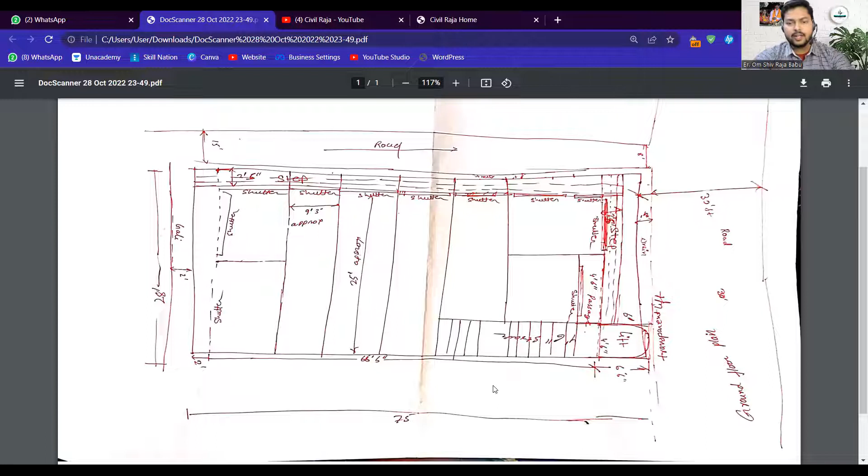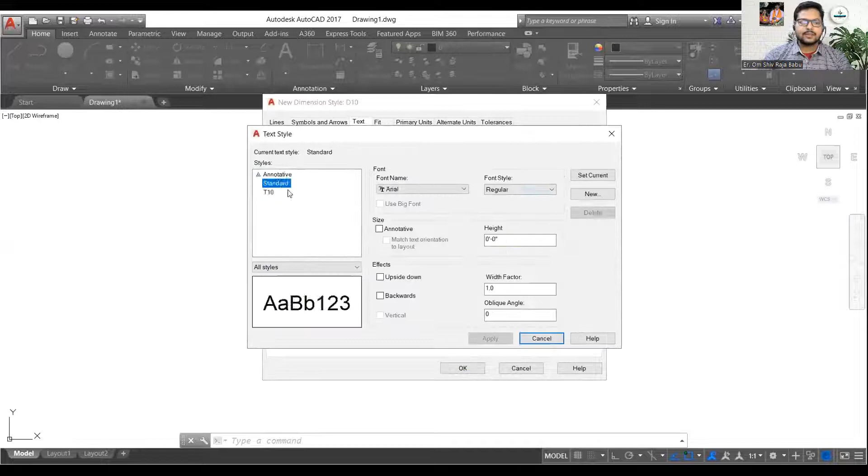I'm going to start with the drafting portion, and for that I have to set the units in AutoCAD. I have already discussed many times how we have to set the units, how we have to decide the precision, how we have to work in layers. All of this is already discussed in detail.

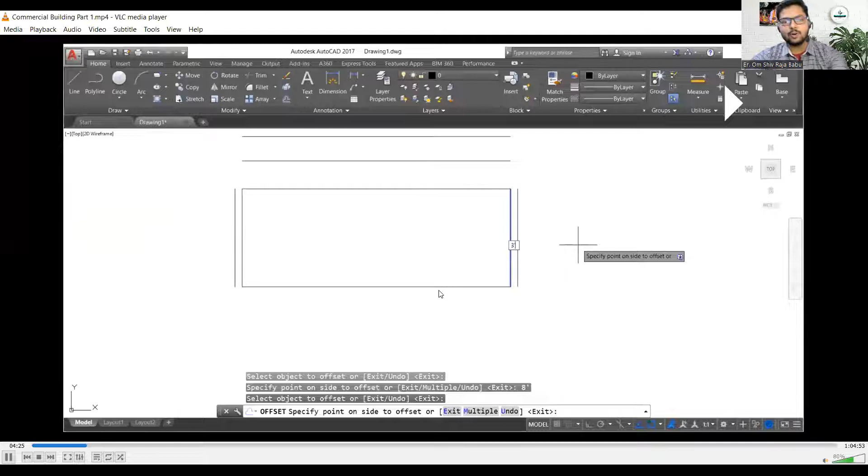Over here you can see I am just drafting everything in the manner that I have discussed. Okay, I think there is some kind of glitch over here. Yeah, now it is working.

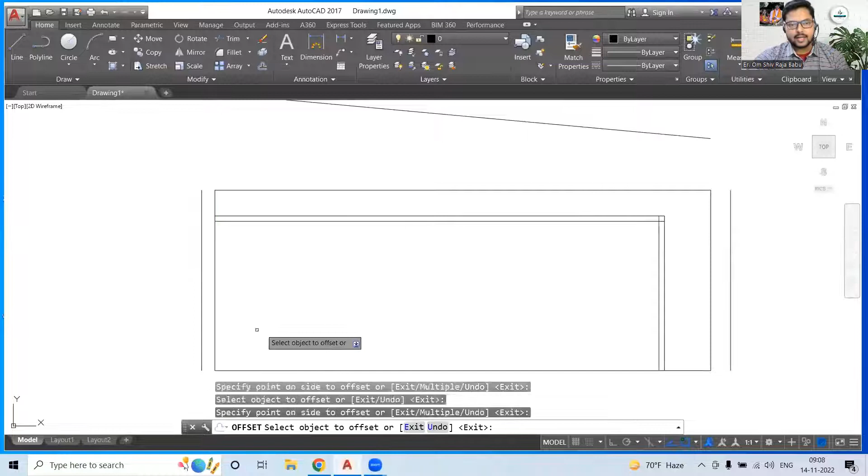So I have to set the units, and after that I will just go with my plot size. On the left I have the gully, so for that I have left a 2 feet wide gully, and on the right another thing that is a 3 feet drain, and the road is also shown over there.

After that, I have to work on the external walls. External walls are taken 10 inches over here, and then I will go for a 9 feet wide shop individually, going for 7 different shops over here. For the internal walls, I am going with a 5 inch wall.

So this is my plan, guys. After that I will just check how much space I'm getting. So in the front, I'm getting a shop of 9 feet 10 inches wide.

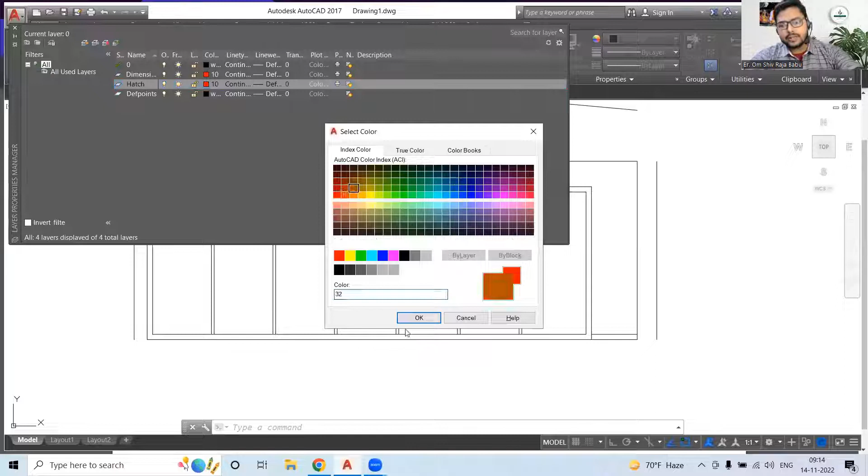After that I have to work on different things over here, so I will just go with different layers. I am creating different layers for the hatches, for the columns, and for anything I am going to need in this particular plan, like even the doors and windows, I will create a different layer.

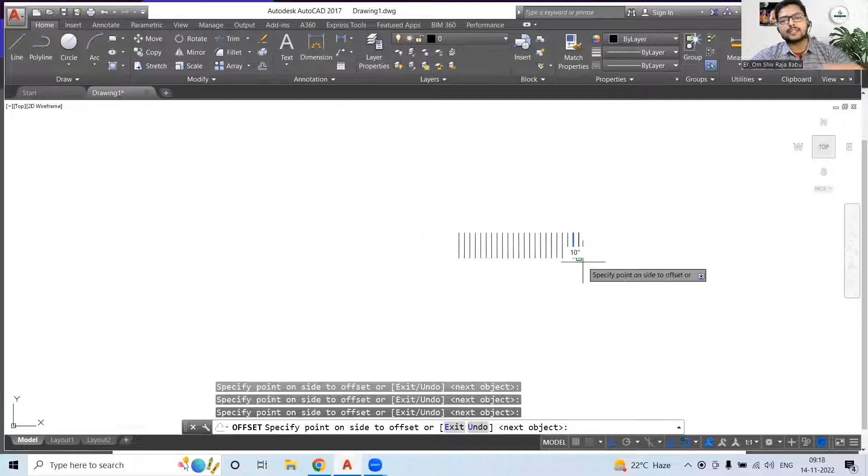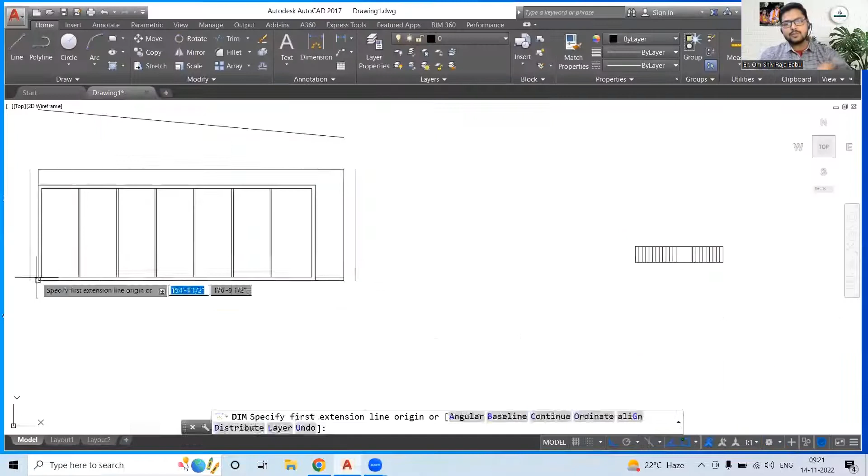Then for the staircase, I know I have to go for a staircase, as you have already seen in the plan drawn on paper, and accordingly I have to move over here. This is not the final draft, guys, this is the first draft, and we will come up with multiple options of this particular commercial building. I'm just going to suggest this thing to my client.

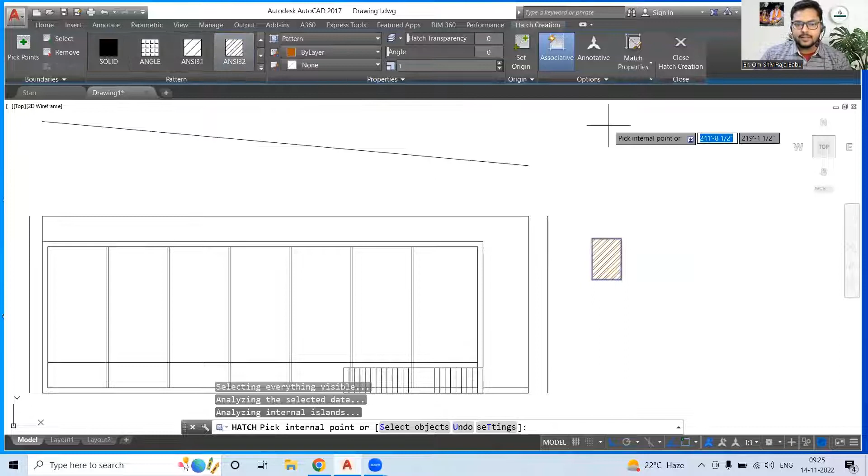If he will like it, then we will go ahead with it. If he will not like it, or if he will suggest some kind of suggestions, then we will go with that one also. So we are going with the first draft over here. So our staircase is done. Then what we need is a lift, right? So in the paper we can see we have a lift also, so we will go for the lift.

The lift dimension I am picking is 4 feet 6 inches by 6 feet 6 inches. I have placed the lift in the front of the road, and now you can see there's just a gap of 2 feet 6 inches, which is not a good gap. So I need to move my staircase so that I can have a space of at least 4 feet 6 inches over here.

Why 4 feet 6 inches? Because my treads are 4 feet long and 10 inches wide. So now I need to reduce the size of this shop also so that we can have a clear idea over here.

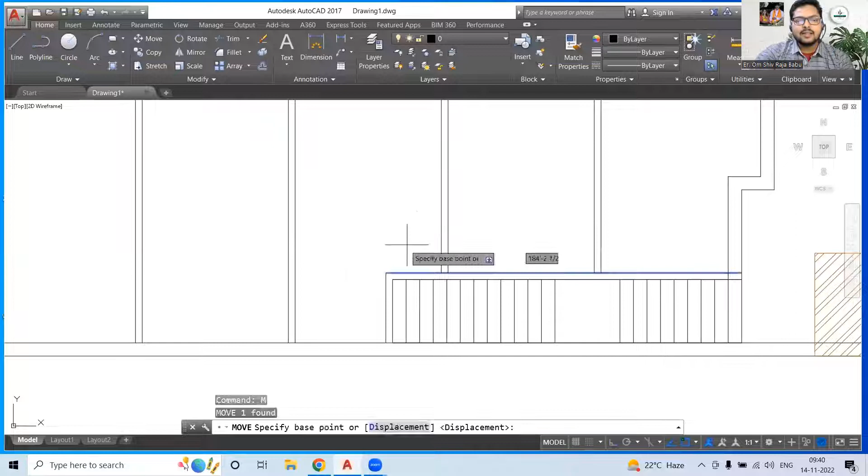I'm not using any complex command, just simple commands to make this complex plan. What you can see here is I'm drawing the lines again because I thought these lines were a little inclined, and I know the quick techniques of doing things, so I don't have to worry about anything here.

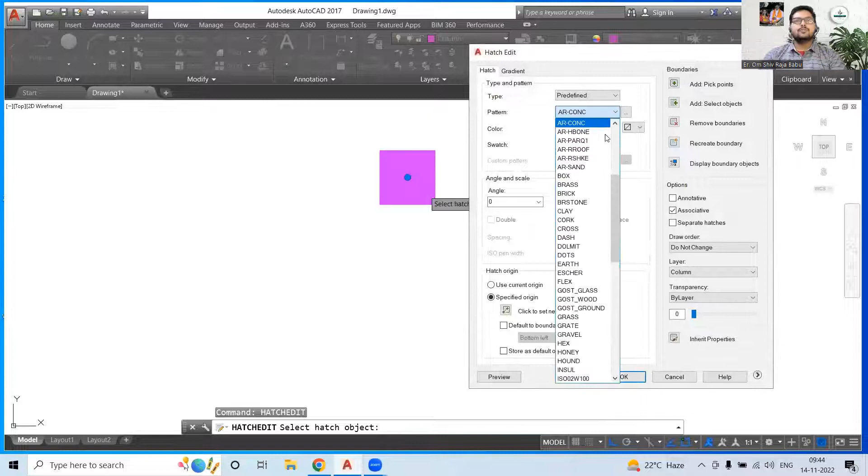Now all my particular shops are ready over here. What I need is columns, because only if I place the columns can I decide for the shutters. You know that in shops we do not use normal doors, we usually go for shutters. So if I'm going with that, I need clear spacing there.

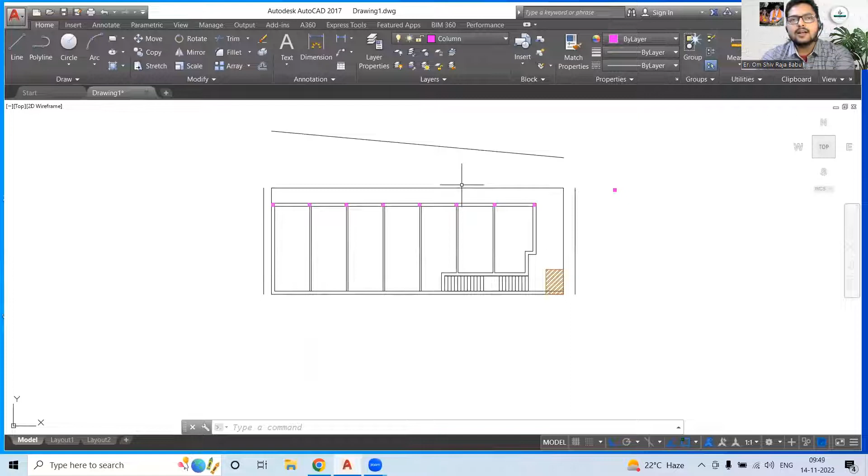For the shutters, even if your client is asking for a 9 feet wide shutter, try to do that. If the space is restricted, don't worry, because for the shutters the mechanical workers will come to you, take the measurement, and create the door according to your requirements. They don't usually have ready-made doors; they modify according to the client's requirement.

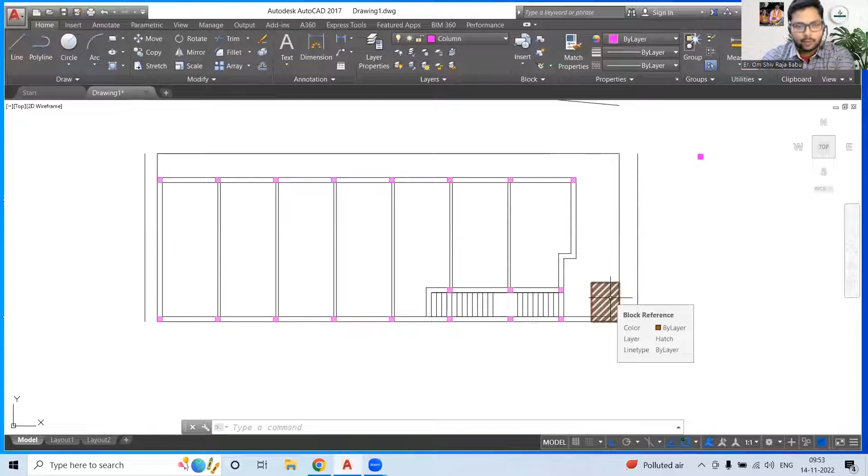So you can see I have placed all the columns over here. In the staircase I have provided more columns - why? Because the staircase has to be made like this, unless you are going for a cantilever staircase. Then I will simply trim out all the options, like all the walls, because if I don't, it will create problems while hatching the space.

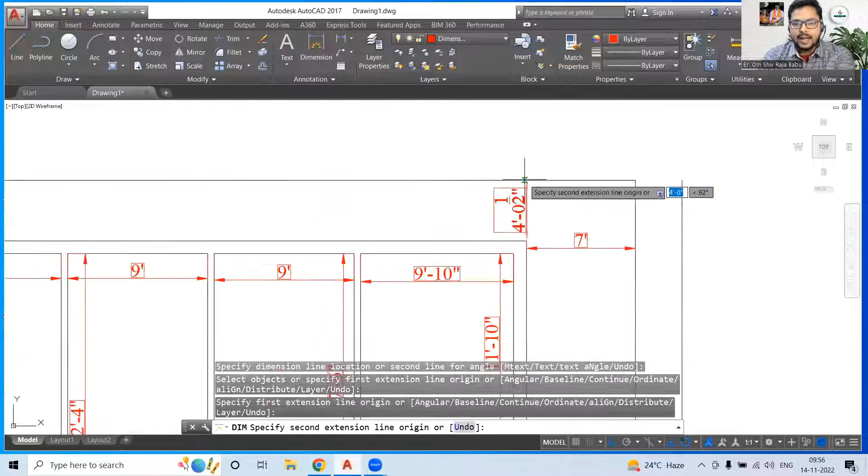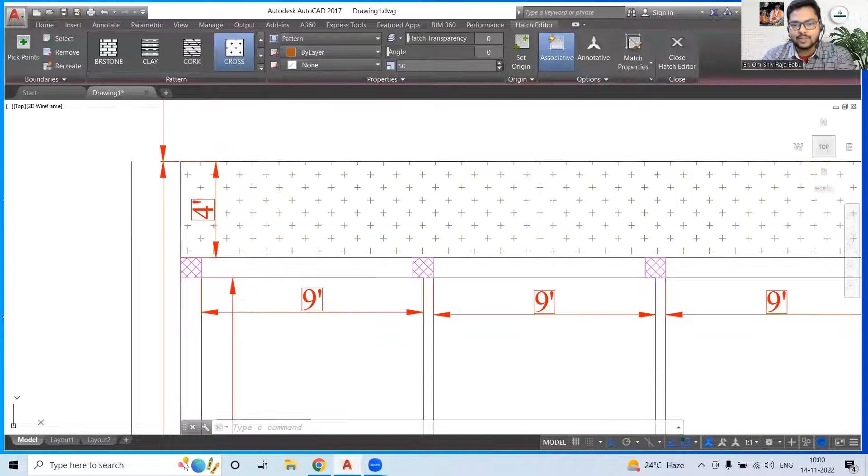Then I need to mention the dimensions. If I don't give accurate dimensions, my client won't be able to understand everything properly, so I need to give proper dimensions for whatever planning I'm doing here. Then the next thing is to create some hatches. Once the hatches are created, it will be clearly visible to my client that this is the parking area and so on.

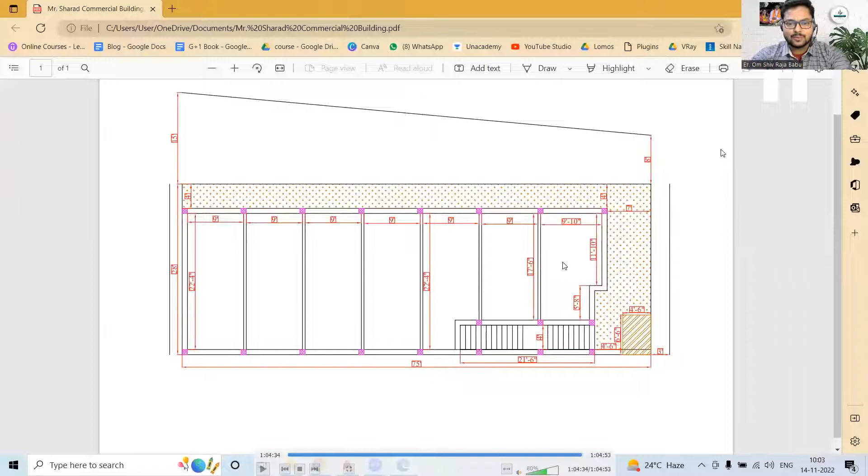Then I need to print it out, and for that I am using a precise technique, which I have already shared with you on my Civil Raja YouTube channel. You can simply visit that one also.